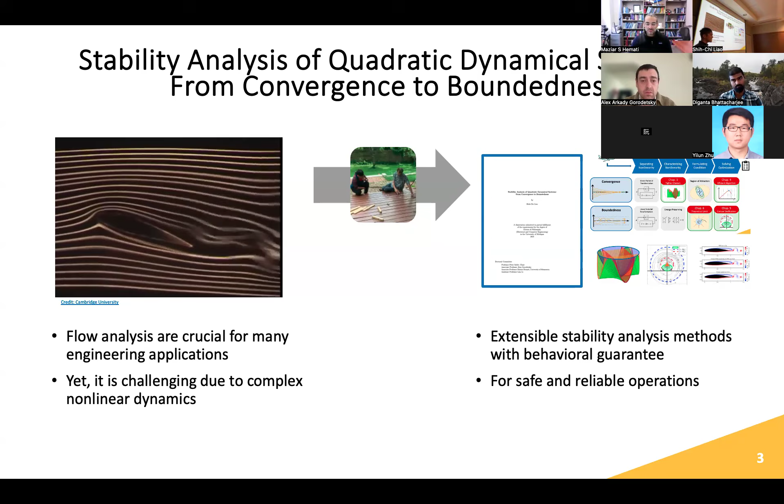Today, in the following 14 to 15 minutes, I'm going to share a few things we discovered on this journey, and hopefully have some interesting stories to share.

In an engineering project, we typically start with a nonlinear complex system, and we start with a set of requirements that we want this system to satisfy, to do, or not to do. With this set of requirements, we go through a series of modeling, design, and analysis that captures the essence of what we care about, and design around it with analysis to make sure we can actually achieve it. This is an iterative process—you might do some analysis and figure out you need a better model to capture the essence of the dynamics.

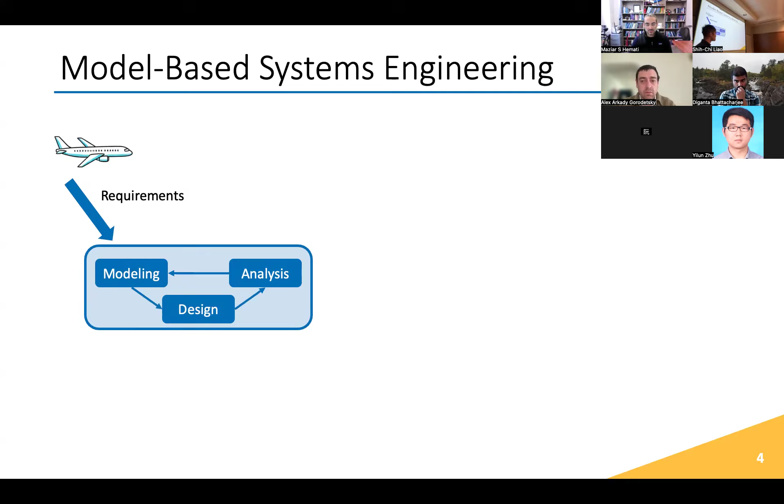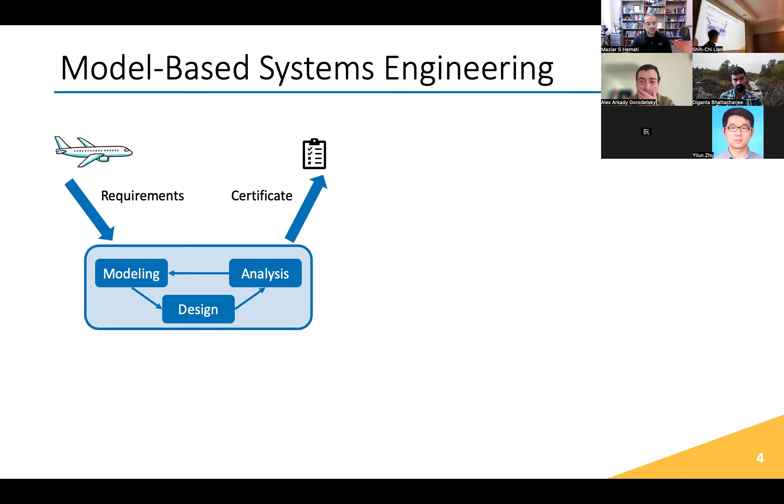After the whole process, you get a certificate that helps you check whether you satisfy a certain behavior or not. As you can see, the modeling side shows up at the very beginning of the engineering process. Therefore, the choice of model is very important in the whole engineering cycle.

If you choose a linear model, it's fairly easy to work with, but in terms of modeling the behavior of the system, it may not be very accurate, because most real-life systems are nonlinear. On the other hand, you can choose a nonlinear system—it can provide a very accurate description, however, working with them, doing design and analysis on that, is still challenging.

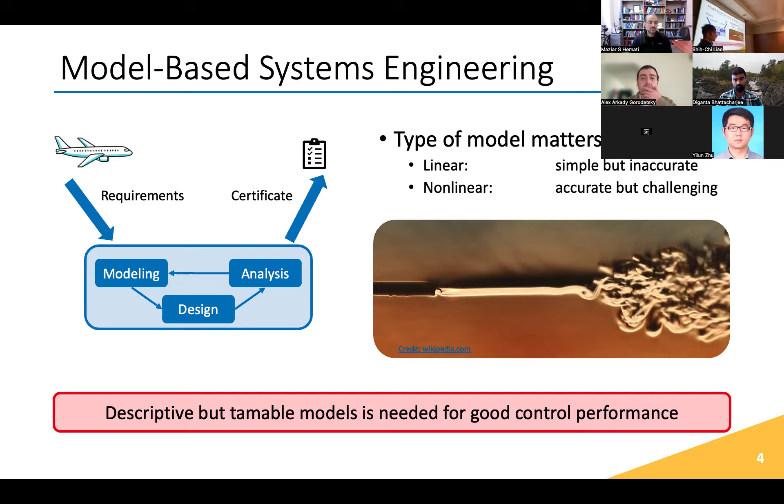Therefore, a descriptive but tamable model is very essential for good control performance, especially for the complex dynamics we are trying to look at.

Quadratic dynamic model in this form is a nonlinear ODE motivated by Navier-Stokes equation. It is structurally simple. You can see that it only involves 3 terms: constant term, linear term, and a quadratic term here.

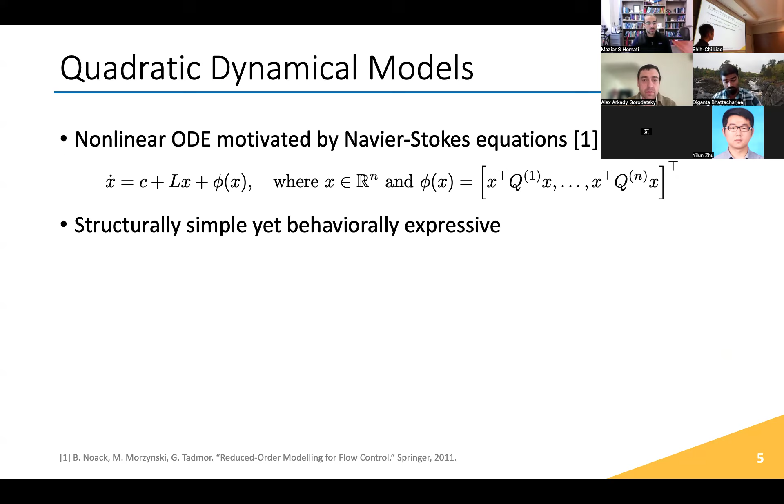But it can capture a wide variety of behavior. That includes limit cycle, bifurcation, and chaos. And those behaviors are very important for nonlinear systems, and that could not be captured by a linear model.

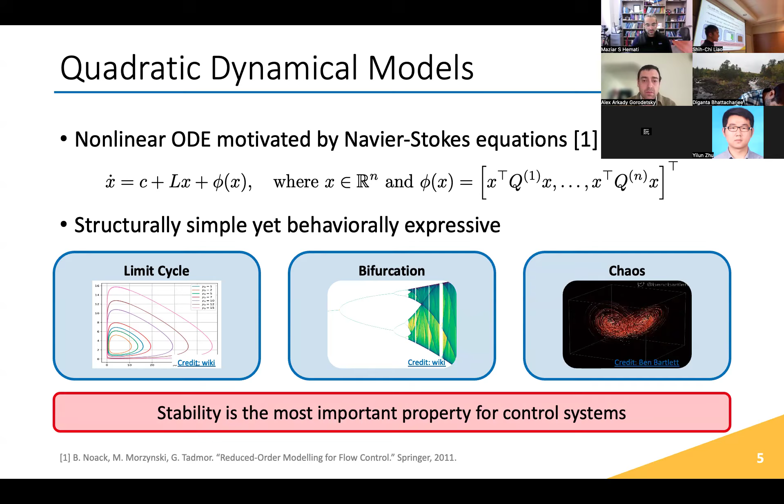And among all this different behavior, there's one most important property we care about. It's called stability in control systems. That is the foundation for everything we can do as an engineering for dynamical systems.

In plain words, stability means the ability to stay consistent behavior. For example, if you are flying an airplane, you might hit some turbulence on the way, and the airplane will start jiggling up and down, and eventually it will come back if we design it correctly. At the same time, it does not go very far away from the desired trajectory. Otherwise, it might hit the other airplane.

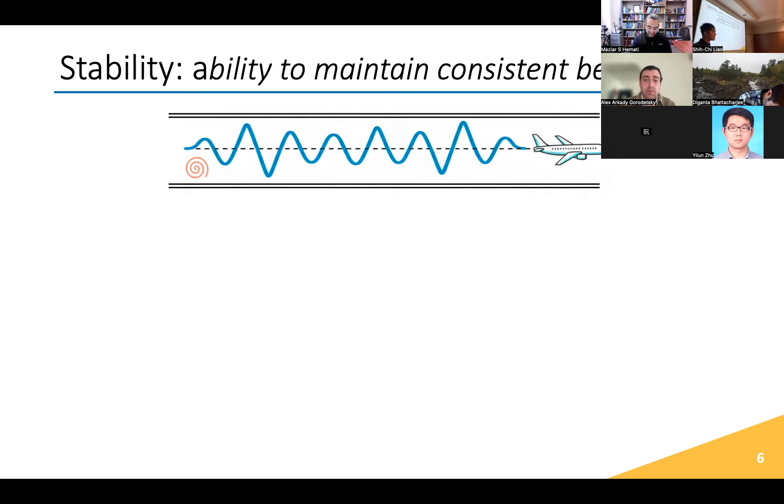There are 2 things happening here. The first thing is called convergence. That means the system will go to a desired state that we design. And the other thing is called boundedness. That means the system does not go far away or go into some undesired state.

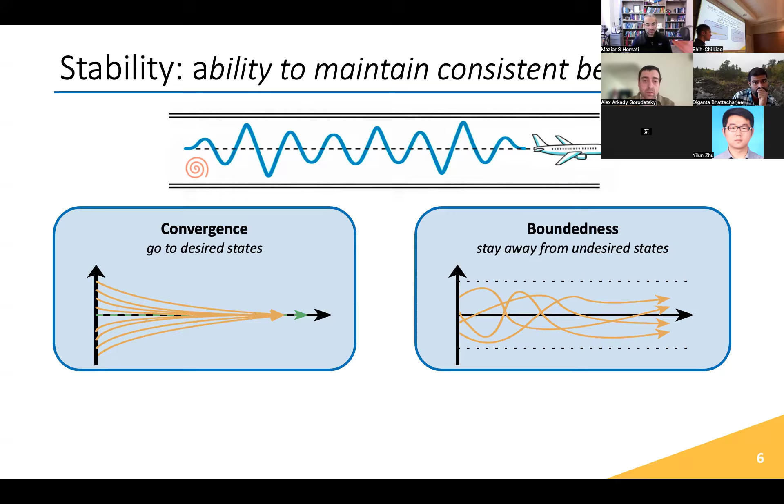These two properties of stability are fairly easy to understand in a linear setting. However, in a nonlinear setting, it is hard to do that, and we need a guarantee for these 2 properties specifically for any useful engineering project.

Therefore, to effectively utilize the quadratic models, we need nonlinear stability with guarantee.

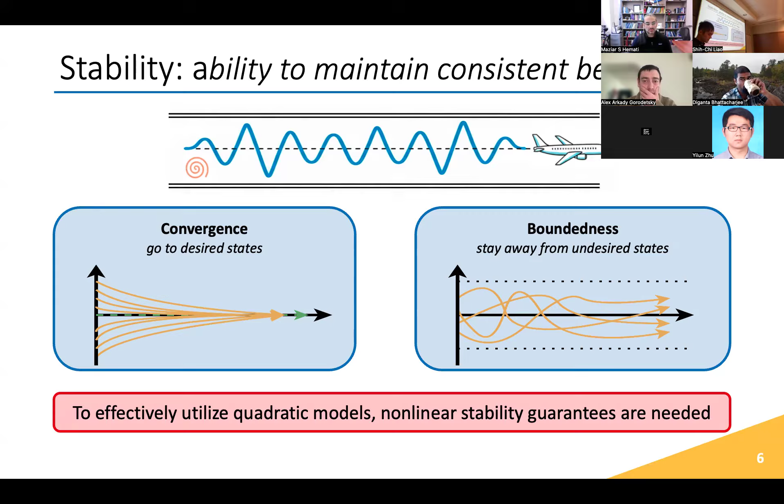In this dissertation, we start with the complex nonlinear system and want to give some certificate on the right here. And we utilize a set of tools from control theory that has a long-standing history all the way back to the 1960s. That involves these 4 steps. Don't worry about it at the moment.

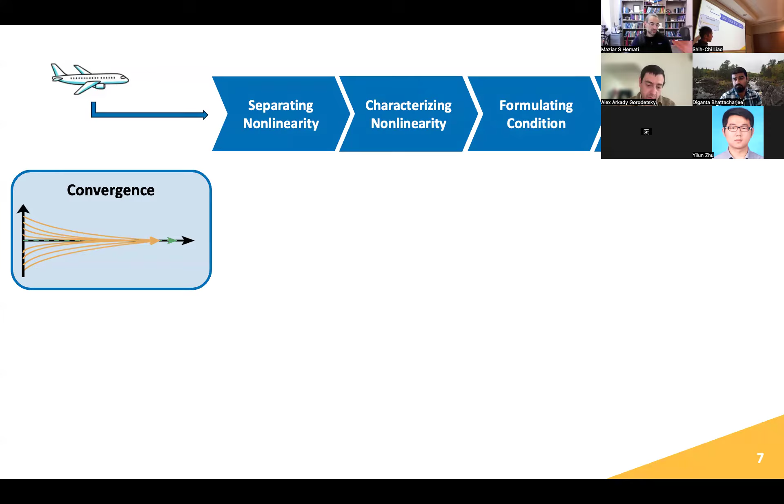I'll explain it later. In the first part of my dissertation, I've utilized this framework to focus on this property called convergence. And I make 2 specific contributions for the particular quadratic system we are looking at. In the first contribution, I provide a tighter characteristic that understands the nonlinearity better. And the second contribution is how we look at the optimization problem involved in this analysis and provide a more efficient algorithm to solve it.

In the second part of my dissertation, I extend the framework into the boundedness analysis. We also make 2 contributions. The first contribution is that we propose a convex approach to solve the condition. And the last contribution in my dissertation, I look at what is the theoretical limit if we are using this whole pipeline to do the boundedness analysis.

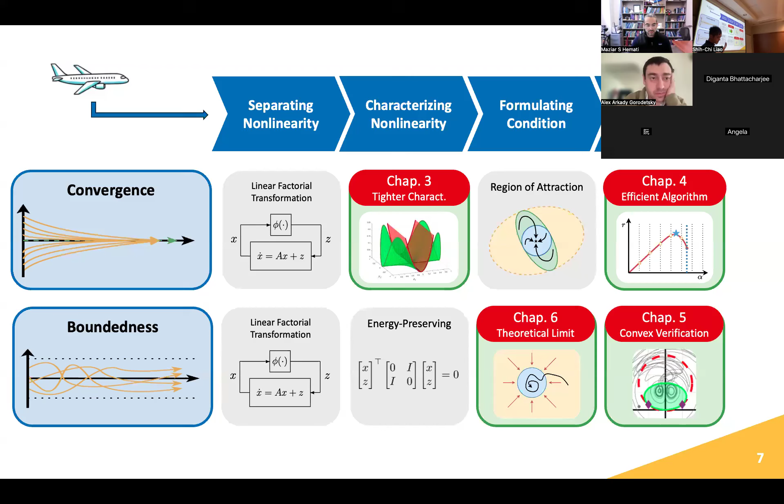With that, hopefully I gave you a very, very, very high level of what my dissertation is working on. Now, I would like to walk you through the whole framework using the example of convergence.

Here is a formal definition of what the problem we are looking at. So we are considering a system x dot equals to ax plus phi of x. Now I'm neglecting the constant term because we're looking at the local stability of the origin.

And the specific stability property we are going to check is that is this yellow circle a region of attraction, which is a region that whenever you start in that region, you will converge to the equilibrium point. So we got a system and we got the question we want to answer.

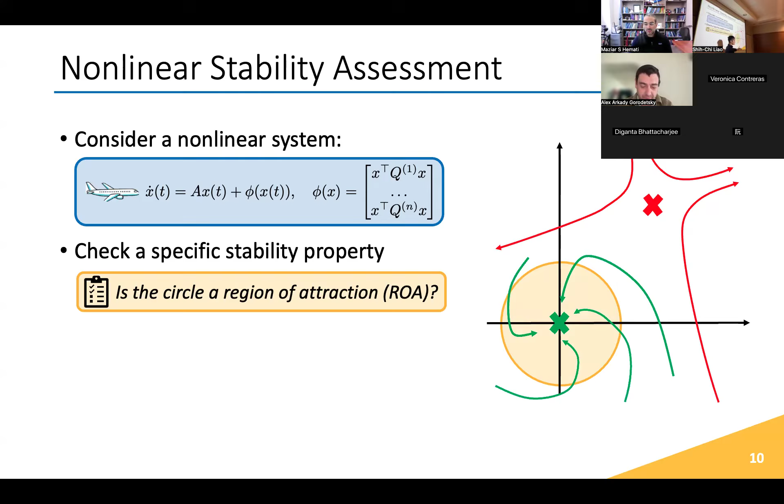One very naive idea you can do is you sample a bunch of points inside a circle and run a simulation to check whether they converge to the equilibrium point or not. However, this process is challenging, especially when you go to high dimensional, you cannot sample every possible point in this region. Therefore, we come to the framework that can provide us a guarantee.

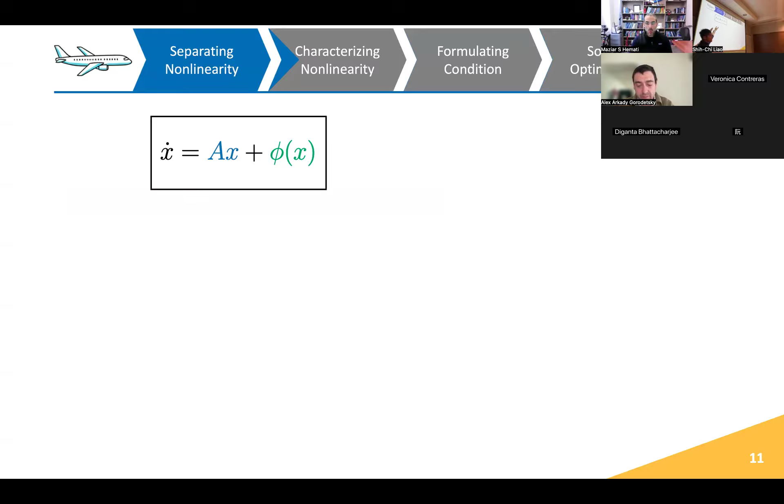The first step of the framework is called separating the nonlinearity. Now we start with the original closed-loop system, and we go through a linear fractional transformation that separates the system into two parts. The first part is the linear part at the bottom, and the second part is the nonlinear part at the top. By doing this, we're basically separating the easy to understand part, and the hard to handle part. On the bottom here, we have a lot of tools to do it.

If we can capture the upper part, the nonlinearity part, in some way, we can utilize the linear analysis down here to provide some guarantee on the whole closed-loop system.

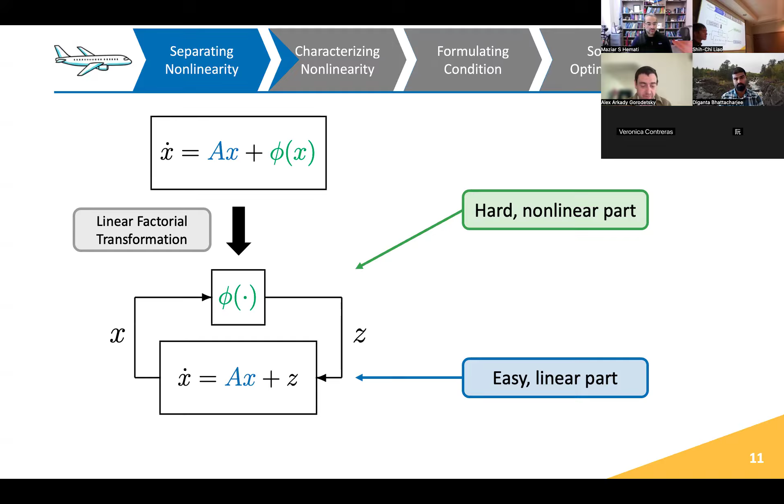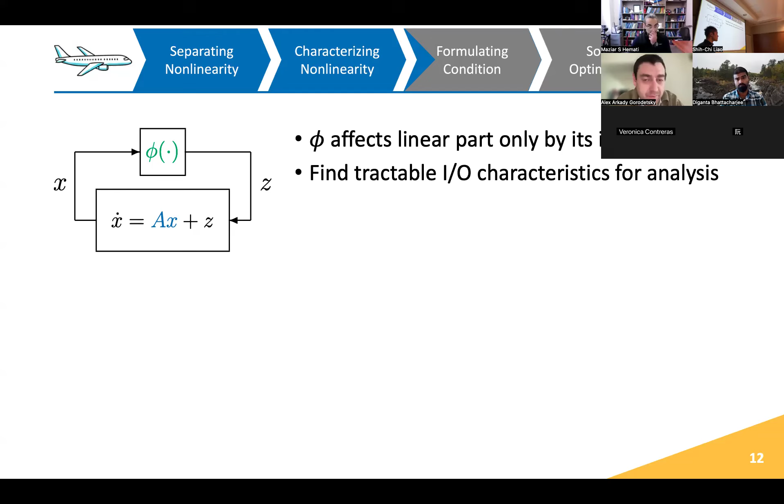So that comes to the next step that we want to characterize the nonlinearity at the top. And you can observe that the linear part of the system is only affected by the nonlinearity through its input and output x and z. So if we can find a tractable input-output characteristic of this nonlinear system, then we can use it in the analysis.

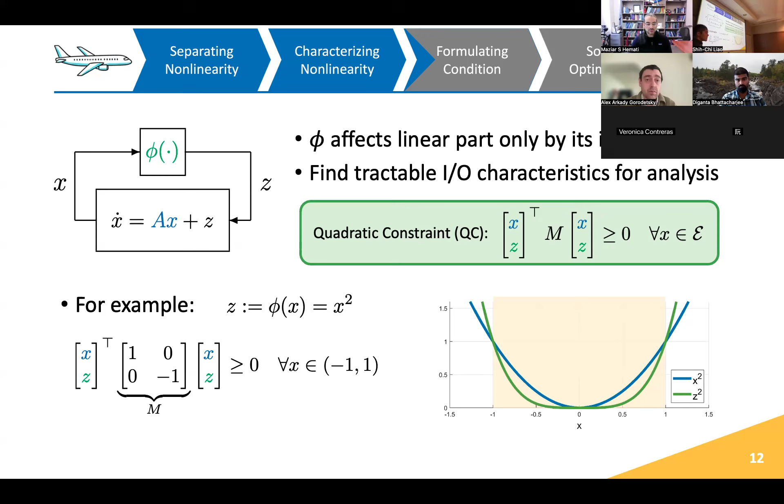So with that, we are ready to propose the stability condition. And the main tool we are going to use here is called a certificate function. It is a function v of x, a value function that has two main properties. The first property is that it is positive in the domain, and the time derivative of it along the system trajectory will be negative. These two properties can help us guarantee the stability property of the system.

In the literature, it takes a form of the Lyapunov function or storage function for a dissipative system, or barrier function if you care about the safety of the system.

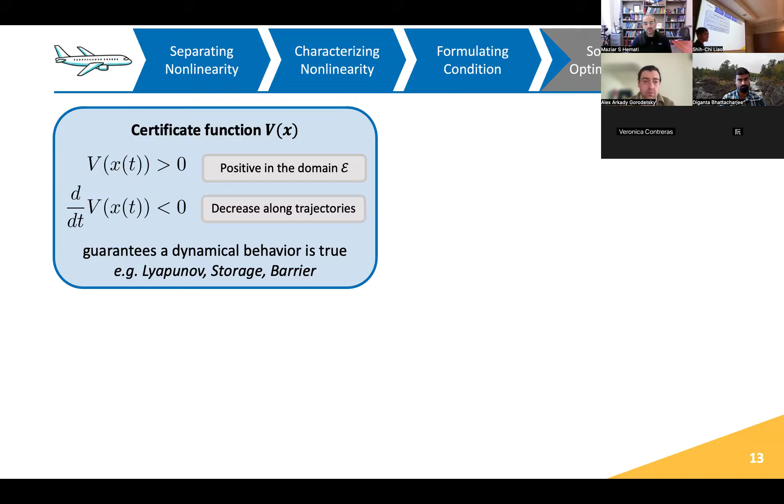Visually, people typically have this bowl shape of function and say that on each point of the bowl, the dynamic carries it to the bottom of the bowl. Therefore, you can translate that to the stability of the bottom of the bowl, which is the origin, is stable.

Now let's look back to our problem. We've got a closed-loop system, and we've got a quadratic constraint to characterize the nonlinearity. We can consider a quadratic candidate function in this x transpose p of x form, and the p is a positive definite matrix.

That means every eigenvalue of p is a positive value, and the v of x can be guaranteed to be a positive value for any non-zero x.

To verify the second condition, that it decreases along the trajectory, we can utilize this matrix inequality. If we can find a multiplier xi here, such that this matrix inequality holds, then we can guarantee that the time derivative of v is less than 0.

You can show this by multiplying the input and output on the left and right side. This part is the quadratic constraint we characterized in the previous step, and this part is always positive. So the sum of the time derivative of the output function and a positive term is negative, and you can guarantee this part is always negative.

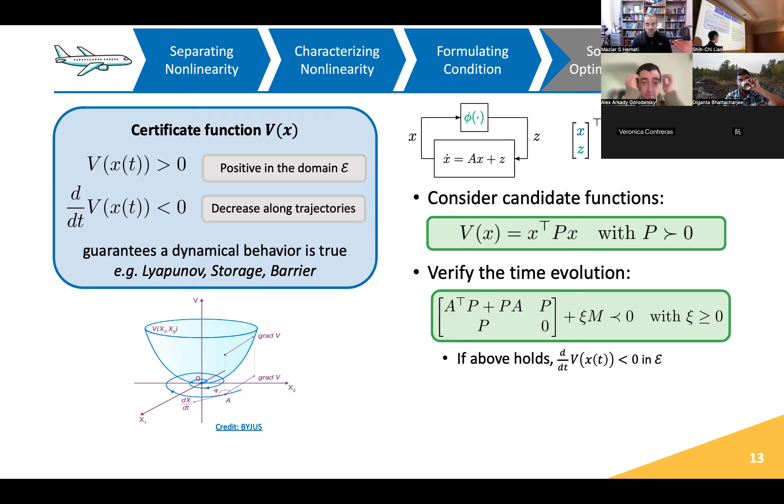With that, we can actually find the characteristic of a region of attraction in the system. So now we have the condition that guarantees the stability of the system. But the question is, how do we actually find this P and xi here?

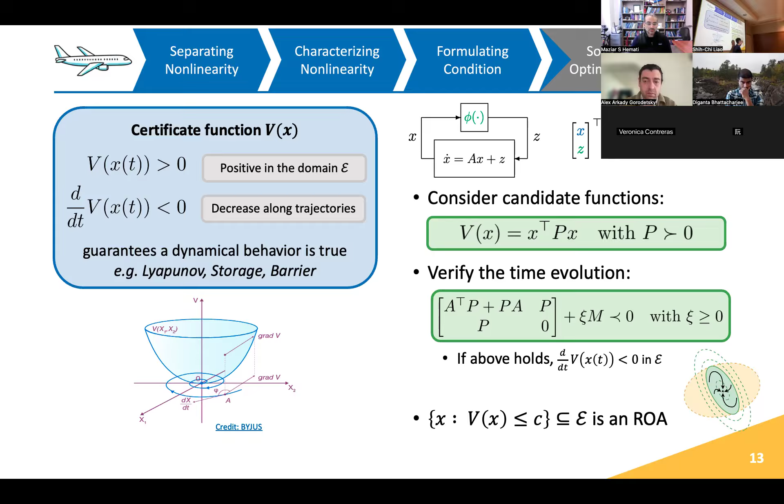So that comes to the last step of the framework. Basically, we want to find these two, one matrix and one scalar, such that this inequality holds. This type of question actually falls into a class called semi-definite program, which is an optimization problem involving matrix inequality in the constraint.

And we can solve it using convex optimization. There are a few benefits of it. The first one: because we're using an optimization formulation, we have a very flexible problem formulation that we can minimize or maximize some quantity subject to the constraint.

And the second benefit is that we have a strong theoretical understanding of this type of problem. We can know when it can be solved, and we can also show that if it cannot be solved, we can provide a certificate that the condition cannot be solved.

And lastly, we have a lot of reliable numerical libraries existing that we can solve it with, so we can implement the problem very easily and solve it quickly.

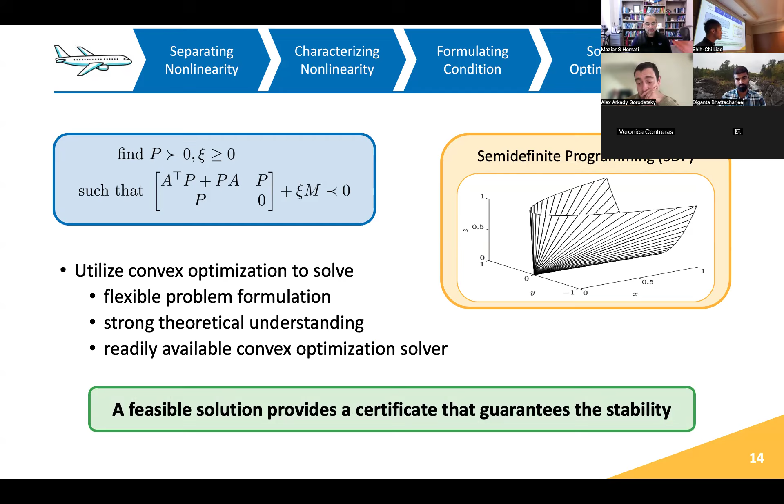So at the bottom of this pipeline, if we get a feasible solution from the convex optimization solver, we basically get a certificate on the stability guarantee for our system. So this is the pipeline.

Here I'm going to talk about what specific contribution we made for the quadratic system. If you closely look at the nonlinearity in the system we care about, there are two major types of nonlinearity.

The first type is called sign-definite. That basically means the nonlinearity is either always positive or always negative. But for a sign-indefinite nonlinearity, the value of the nonlinearity can be either positive or negative given different inputs.

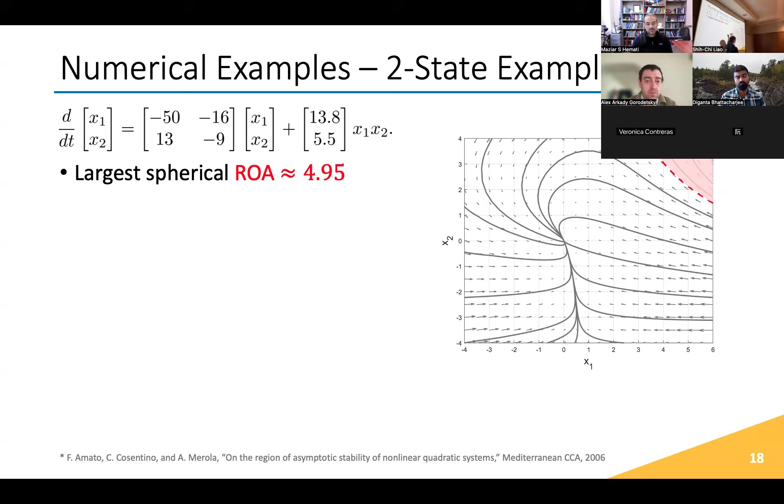By using our framework to do the analysis, the first set in blue is what people do in the literature, where the quadratic constraint does not capture the specific landscape of the nonlinearity we care about. The proposed quadratic constraint that includes the valley can perform better and give a better region of estimation for this specific system.

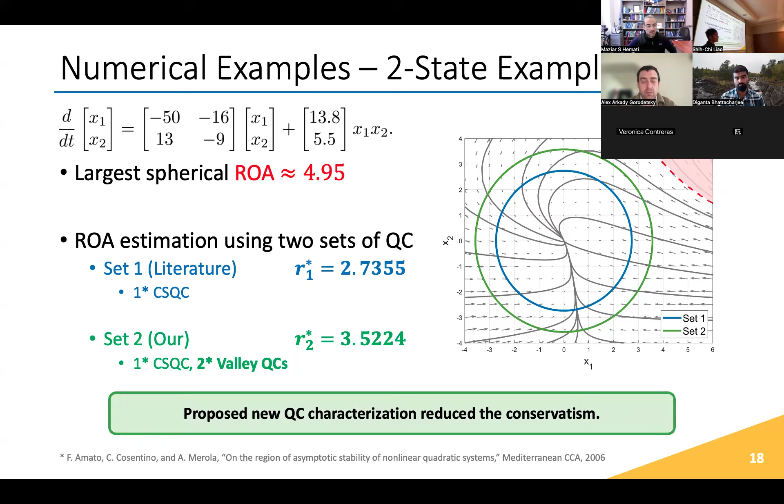So basically, in this chapter, we propose a new quadratic constraint that captures the specific nonlinearity dynamics and reduces the conservatism in the analysis framework. That's the first contribution I made.

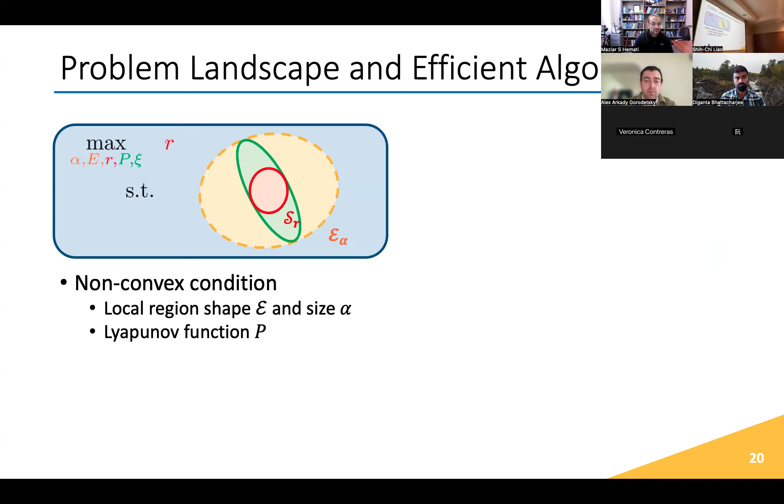This constraint here is actually a non-convex constraint because it has a complex interplay between the local region and the Lyapunov function you choose.

In the literature, people solve this by gridding over the shape, fixing the shape of the local region and gridding over the size of the local region. For each point on the grid, you can solve an SDP to get a point like this.

So if you solve this problem, you might think the maximum could be here. But for these 2 specific grid points, the SDP is actually infeasible.

In this chapter, we look at this problem specifically and try to understand how this R relates to the size of the local region we care about.

We sample a bunch of different systems, and most of them come out with this type of shape. We look further into it and figure out...

that this alpha actually has a limit, beyond which no problem will be feasible. We can show this by mathematically proving it.

With this knowledge, we can develop a more efficient algorithm using bisection search to identify this critical point. We also observe that the function here is mostly unimodal, so we can use a golden section search to identify the critical point.

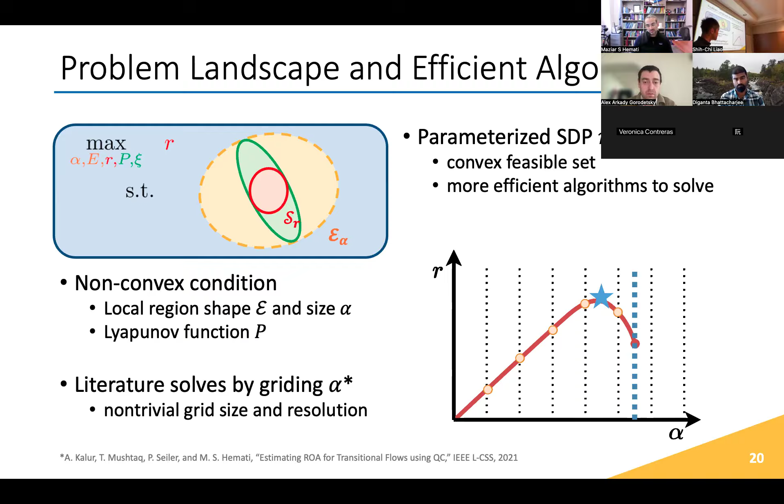So up to now, I covered the convergence and the first 2 contributions in the dissertation. Next, I will talk about boundedness, and how we extend the whole analysis framework to this other set of stability properties.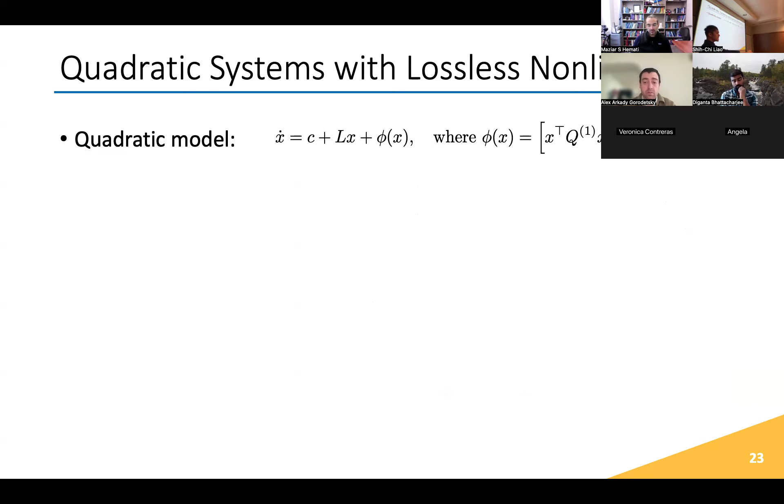So let's look at what we are looking at. This model we are looking at here is x dot equals c plus Lx plus phi of x. Now we are including the constant term because we are modeling a fluid dynamic system. We don't essentially assume we shift to an equilibrium point.

One important assumption here is that this nonlinearity is lossless. That means the inner product between the input and output of it is 0 for all x. This is an assumption based on the Navier-Stokes equation that the nonlinearity does not generate or dissipate energy in the dynamics. And you can see that this is actually in the quadratic form. We can write it in this way.

That gives us an opportunity to put the whole analysis into our framework. One technical note here is that this specific property is preserved under the change of coordinate. If you define a new coordinate y that shifts the original coordinate by m, you will get a new set of ODEs. However, the nonlinearity will remain the same form. Therefore, the lossless condition will stay the same.

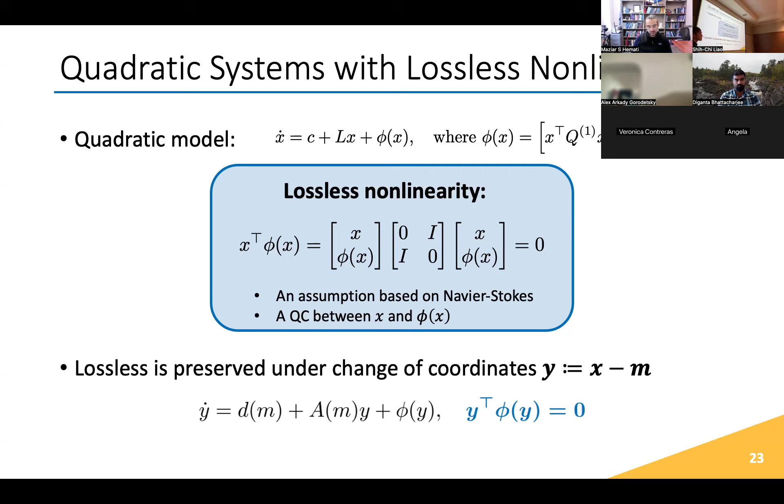In the literature, Schlegel and Noack in 2015 proposed looking at this problem by a notion called trapping region. Basically, they use a kinetic energy, that is a certificate function we were talking about, that takes the form of 0.5 of y transpose y. That is the kinetic energy at the new coordinate. And if you take the time derivative of it with respect to the system dynamics, you can see that this lossless property shows up, and that means the nonlinearity does not exchange any kinetic energy in the system. Therefore, the kinetic energy is only affected by the constant dynamic and the linear dynamic here.

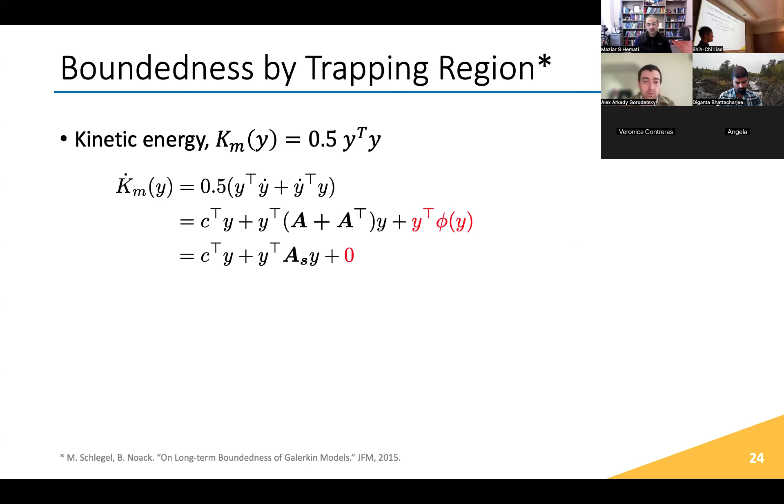And you can see that this term is quadratic in y. So if you have a large y, that term will dominate the first term. Schlegel and Noack proposed that if this matrix is a negative definite matrix, that means for any y, this quantity will be less than 0. If you have a large enough y, you can guarantee that this k dot is less than 0. That means if you are far away from the phase plane, you will eventually come closer to the origin.

But if you have a smaller y that is closer to the origin, we cannot guarantee anything happen between the constant dynamic and the linear dynamics. With this trapping region, we can show that the system is actually bounded, because if you are far away, you will get pulled into the origin, so you are not diverging to infinity. However, in the literature, they don't have a reliable numerical approach to verify this condition.

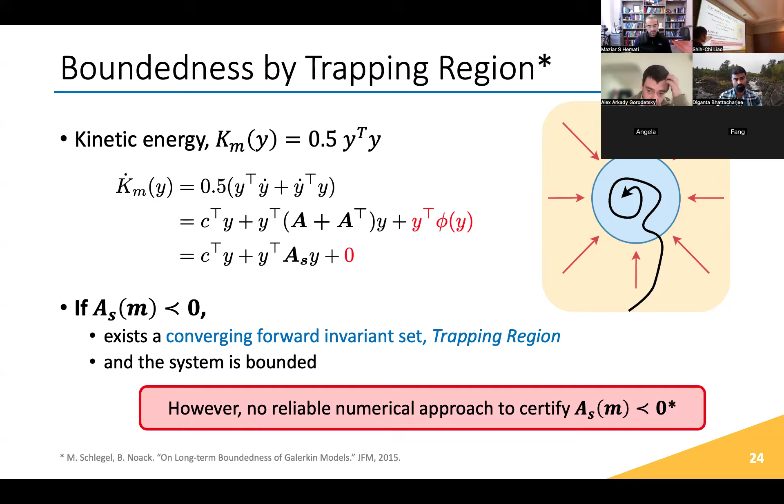To put that into our framework, we have this lossless quadratic constraint that is the assumption on the system, and we have this trapping region as the stability condition we care about. Now I'm going to introduce how we solve it using convex optimization.

If you look at the condition closer again, this AS matrix is actually a linear function of m, which is the coordinate shift we are trying to find. And the LS and the Q are the system matrices that are given by the model. Because of this linear dependency on m, we can set up a semi-definite program that solves this.

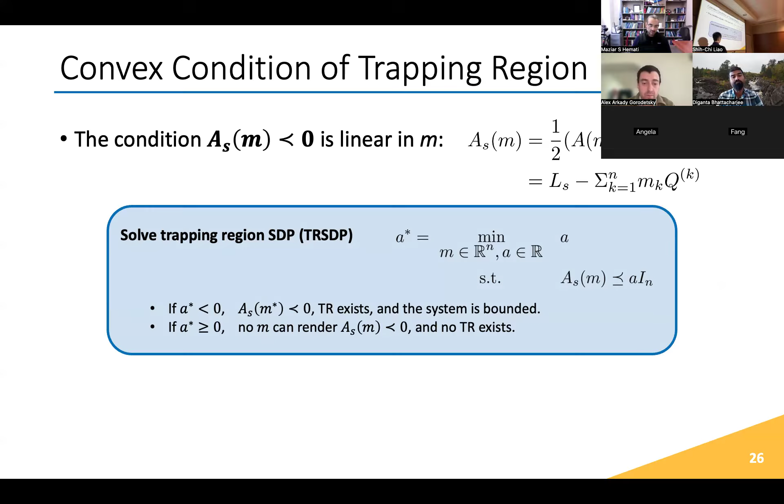Minimize A, that is the upper bound of the eigenvalue of AS. If you solve this problem and get an A star that's less than 0, we basically get a guarantee that there exists an m star such that this AS is negative definite. By the theorem, we can verify that a trapping region exists and the system is bounded.

And if A star is positive or non-negative, we can also guarantee that no such coordinate shift can render this matrix being a negative definite one, and therefore no trapping region will exist in the system.

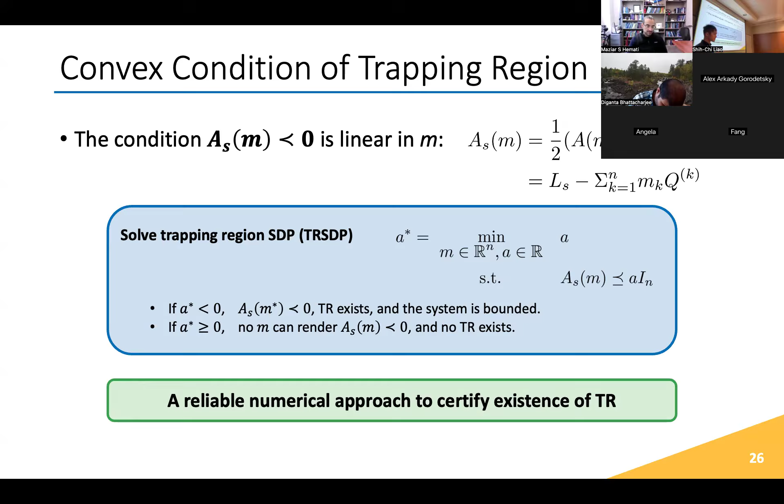With this semi-definite program, we basically get a reliable numerical approach to certify the existence of a trapping region. Moreover, we can characterize the size of it. In the literature, they use this K dot to estimate the size of the trapping region. However, their estimation is actually a worst case estimation, and often it is overly conservative.

Turns out we can actually solve this size exactly by setting up this optimization problem. Basically, we are finding the furthest point in the set that energy can grow. That means for every further point, the energy is always decreasing. And the optimization problem in this form is actually a non-convex problem that we call quadratically constrained quadratic program, with this matrix being a negative definite one. So this constraint is actually a non-convex constraint.

Nonetheless, we can formulate a dual SDP by a process called S procedure. That is a convex problem, and we can show that it does not have any duality gap, meaning that if we solve this dual SDP, we get the exact solution of this primal problem. And lastly, we can recover the primal solution of Y from the optimality condition called KKT conditions.

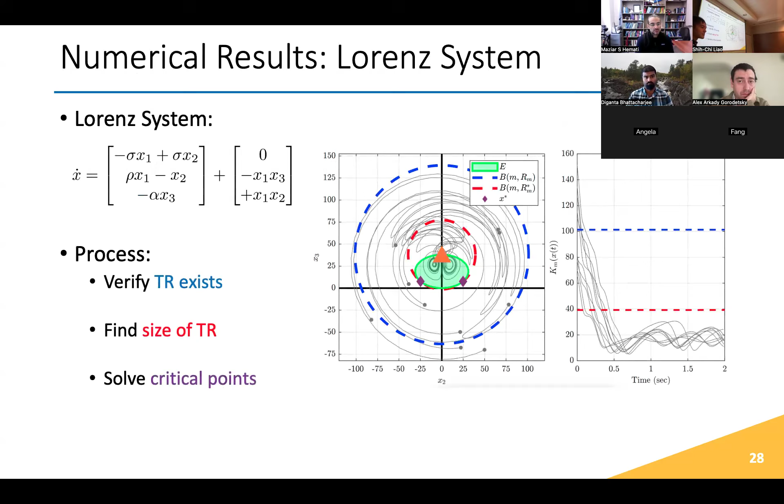So with this convex process, we can actually extend it to other phases of the engineering process. Here we are providing an example in the modeling phase. Because our constraint is a convex constraint, you can put it into any optimization problem and find a very easy way to solve it.

Here we are using a data-driven modeling algorithm called SINDy, developed by Steven Brunton and Nathan Kutz. With this original SINDy algorithm, it only tries to balance between the accuracy of the model and the sparsity of the model, which is how simple your model can look like.

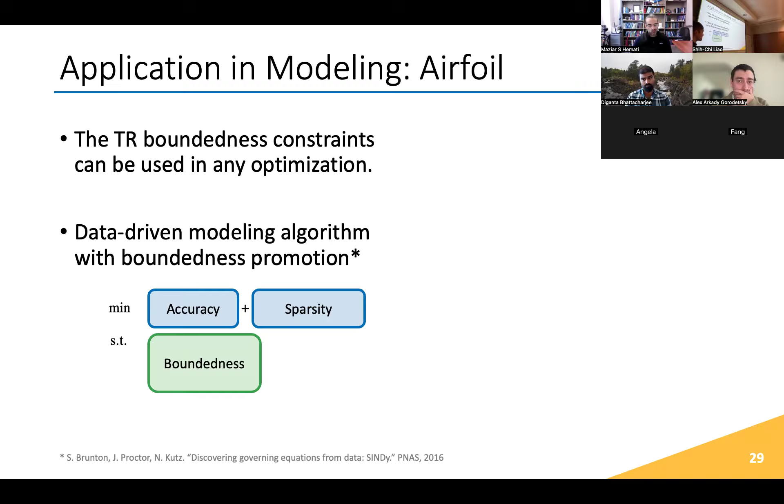And now we are adding another constraint, which is what we analyze as the boundedness, because the original algorithm does not produce any guarantee on whether the system will be bounded or not. With this additional constraint, we can construct a model that can guarantee the bounded property of the system.

Here I'm showing an airfoil simulation where we have a numerical computational fluid dynamics solver that gets projected by some projection step. Then we use that as the initial condition of our model and run the simulation for about 5 seconds. You can see that our model gives us a very accurate approximation to the exact numerical simulation from the top, that is projected down to the low order space, and these two figures are very close to each other.

Now we can use our model to replace the very costly simulation on the top for the purpose of our analysis. If you want to do other types of analysis, you still need to run the simulation, but we can run a much smaller amount of simulation now.

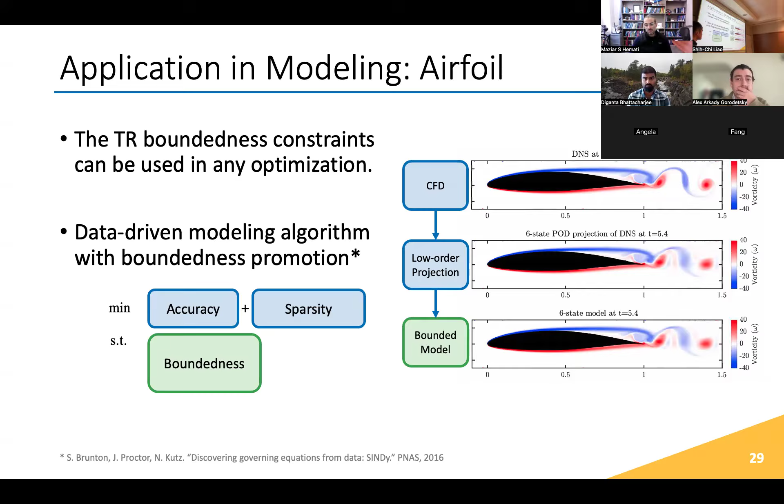So with this convex optimization problem, we bring the whole boundedness analysis into our framework.

The last part of my dissertation looks at how conservative this process is. Up to this point, we are actually using sufficiency to prove this specific property. For convergence, we use region of attraction as a characteristic of the convergence and propose that matrix inequality as a certificate of a region of attraction existing. Similarly, for boundedness, we use trapping region as a characteristic and use that matrix inequality as a certificate of a trapping region existing. So you can see all the arrows are pointing to the left.

There is some work that tries to provide an arrow to the right. However, this reverse direction is much more challenging because you want to verify all the system behavior by altering the trajectory and provide an algebraic condition to show that property.

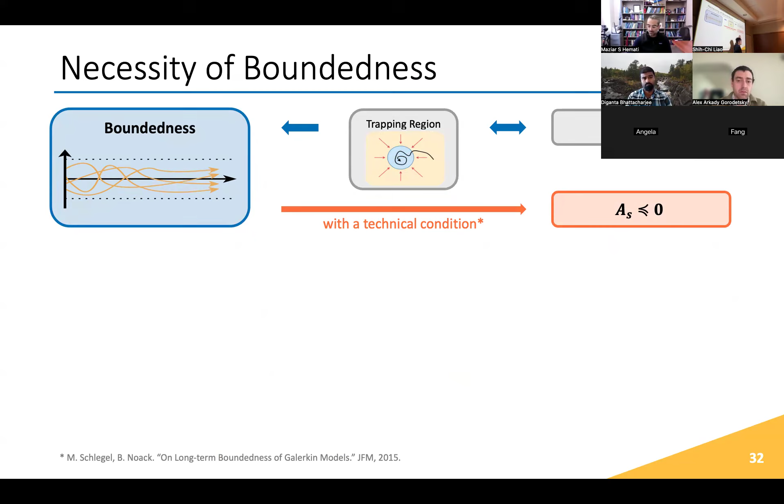However, in the literature, also in Schlegel and Noack in 2015, they have a theorem pointing to that direction with some technical assumption, saying that if the system is bounded with that technical condition, you can show this matrix is negative semi-definite. And this is very surprising to us because they are using a single Lyapunov function to show this sufficient and necessary conditions.

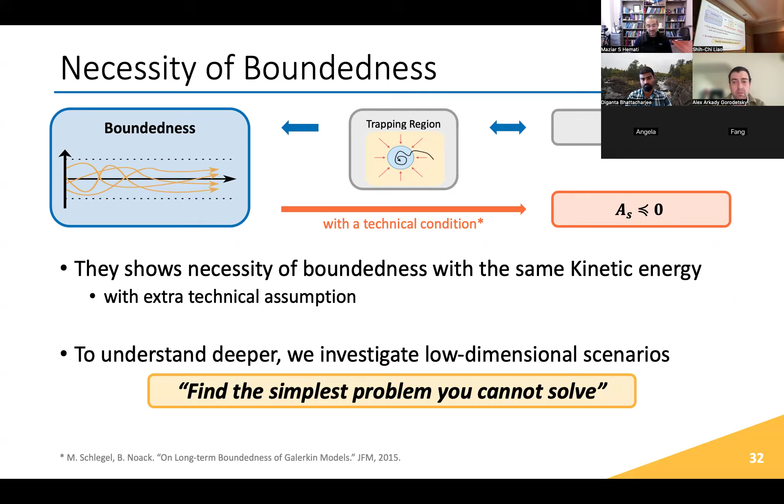So we are really curious about it. And to understand it deeper, we use a very low dimensional scenario to understand how this theorem plays out in that setting, where we fall back to the wisdom that you try to find the simplest problem you cannot solve and try to understand it and get more insight, and hopefully it can translate to a scalable way.

So we first look at a two-dimensional system with some math and coordinate transformation. We actually come down to this condition here that we want to find a set m1 and m2 such that this matrix inequality is negative semi-definite.

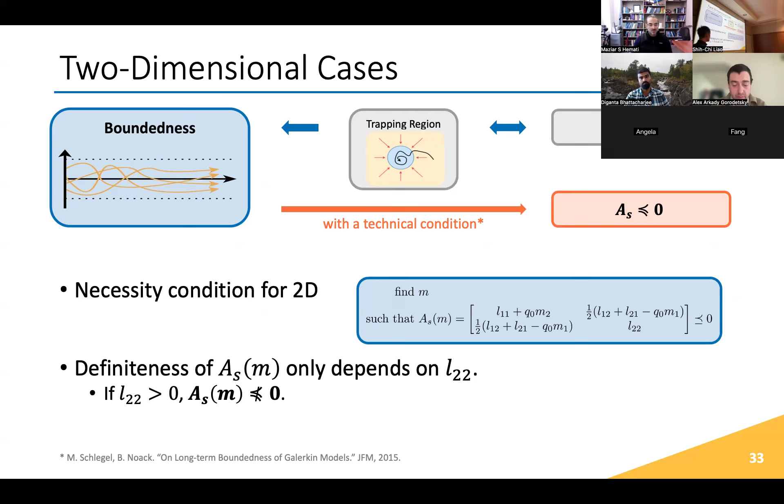And if you are an LMI wizard, you can figure out that only the sign of this L22 matters in this problem. So we look at it and see that the only case that this matrix has a positive eigenvalue is the case that L22 is positive. And if L22 is positive, we can actually further show this system is unbounded. And by contrapositive, we show the condition actually holds with our independent proof. So the 2D case is good for this theorem.

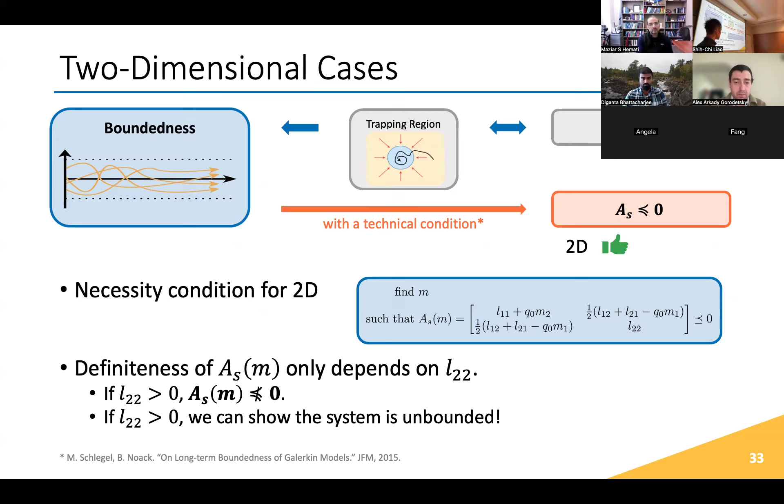And how about 3D? So what we do is sample a bunch of systems and try to look at their property. And what we arrive at is that a system whose origin is globally asymptotically stable gives us a proof it is a bounded system. And also it satisfies the technical condition stated in the paper.

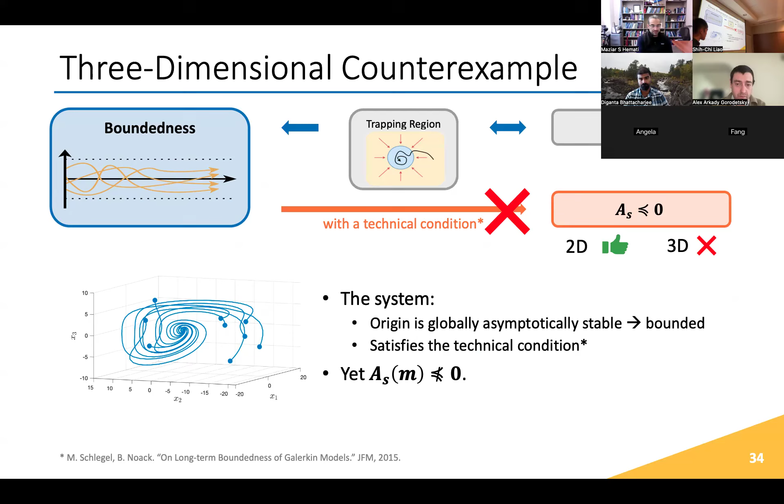However, if we run the LMI, we can get a certificate that no coordinate transformation can render this matrix to be a negative semi-definite matrix. So that gives us a counterexample in 3D that shows that this theorem is actually an incomplete theorem. And there are some implications here because we don't have a necessary direction.

And the second implication is that the theorem we have on top actually does not apply to other strange attractors that are known to be bounded, and people have studied in the chaotic community.

To address this issue, we have an ongoing work that tries to reduce this conservatism, that we are relaxing the lossless quadratic constraint we have in here. It used to be an identity matrix here, but we are relaxing it to a general matrix that helps us capture a wider class of the system.

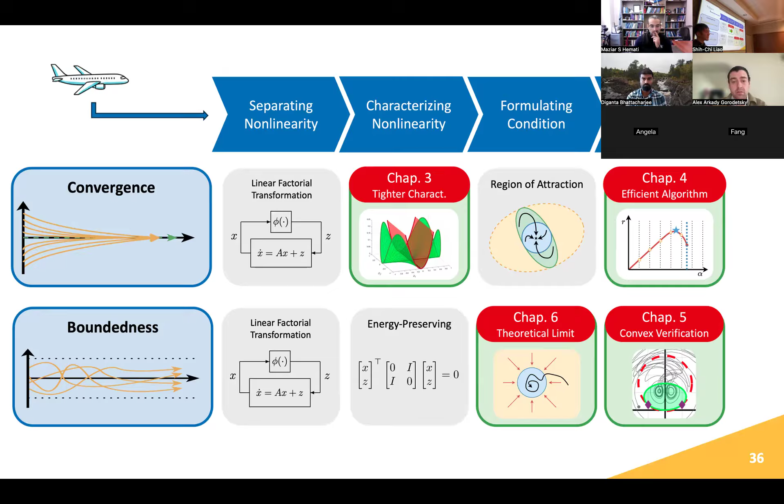So with that, I covered my dissertation that we start from a complex nonlinear dynamics that we want to give a stability guarantee that focuses on two specific stability properties in convergence and boundedness, and we make 4 specific contributions throughout the years. And with this development, we provide an extensible framework that can help us better utilize the quadratic dynamics in the engineering project.

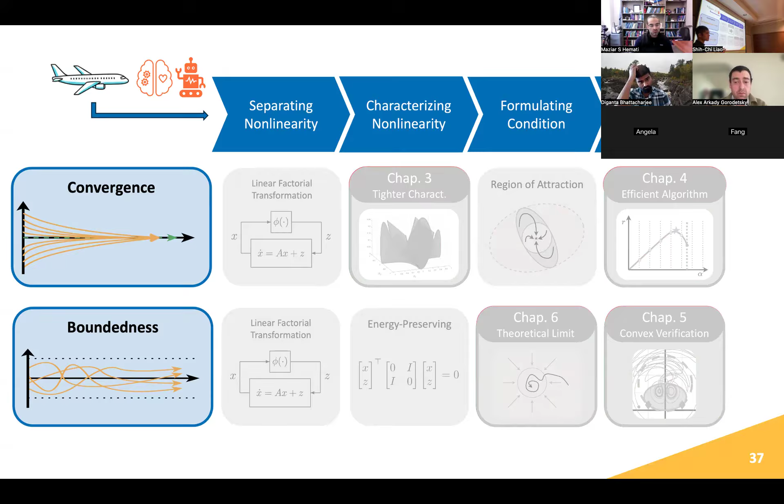With some thought of future work, besides looking at quadratic nonlinearity here, we might also look at other types of problems that actually have higher order nonlinearity. People in the literature have shown that you can actually turn other types of nonlinear systems into quadratic systems. So if you can bring that in, we can use the same framework to do the analysis. So that is the first future direction.

And the second future direction is, as I mentioned earlier, we can extend the framework into the modeling process and also the design process. Or if you're curious about safety, that could also be applied.

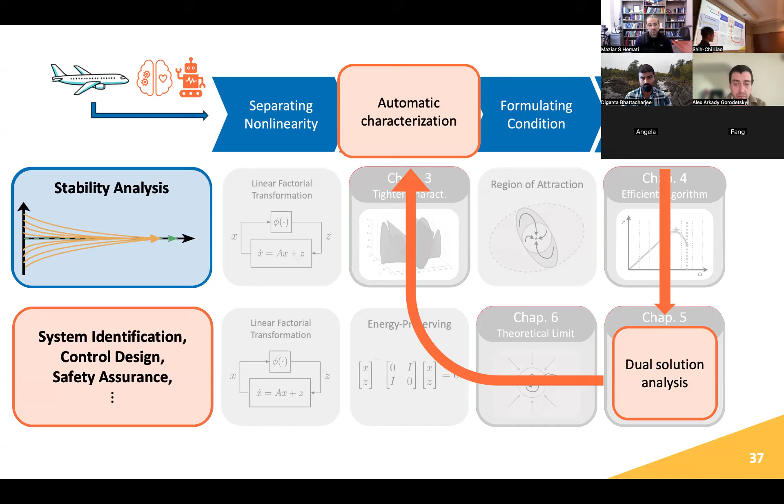And one last future direction I want to mention is that we can actually close this loop of the framework. So by solving the optimization, because we are using convex optimization, we not only get the primal solution, we also get the dual solution, which often characterizes the qualitative change in the system. And by that dual solution, we might be able to find some critical scenarios that we care about in terms of either stability or safety.

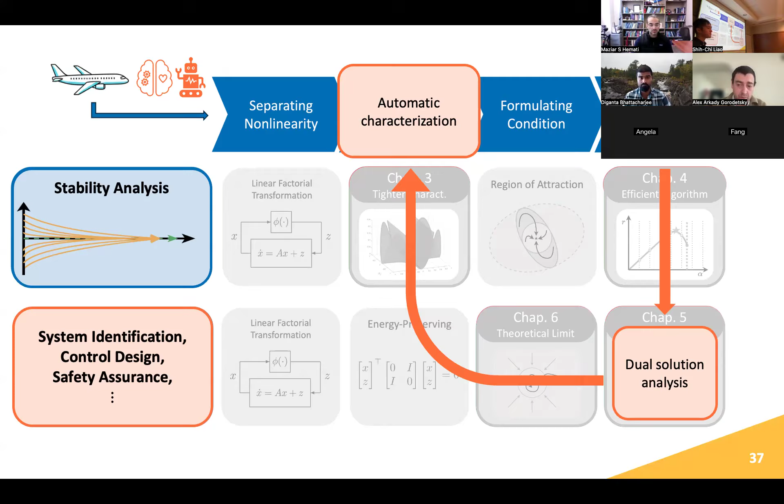And with those situations, we can run a simulation and have an automatic characterization process that, in the quadratic constraint framework, specifically characterizes the nonlinearity over that region. And if we can capture that region better, we might be able to get a better analysis on that specific property. So with that, I have covered my work.